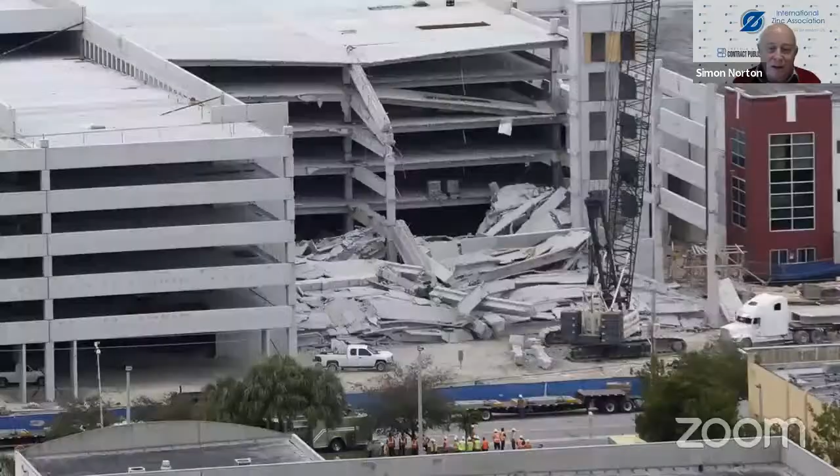You wouldn't like your construction or design to look like this. It's likely this was the failure of a decking system where de-icing salts got into the structure, attacked the reinforcing steel, and the entire building collapsed. What we hope to do with these seminars and webinars, and with today's, is to show you how you can use zinc in its powerful role to protect against corrosion.

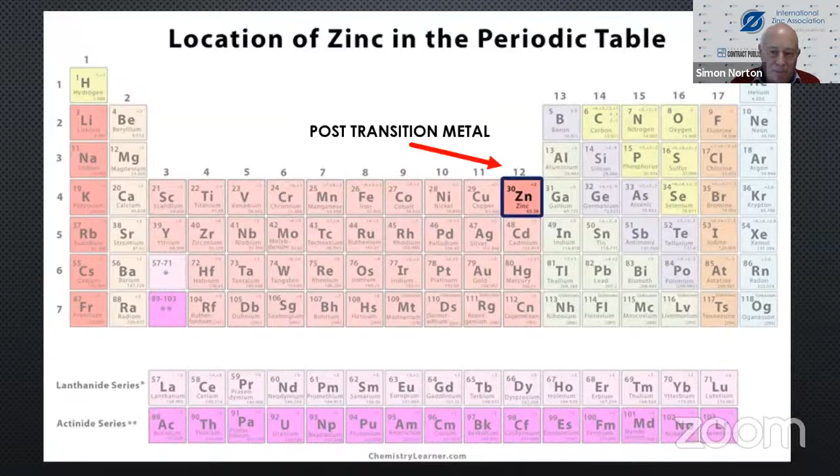Now, zinc in the periodic table is located in what we call the post-transition metal area. The transition metals, the most famous of which are cobalt, platinum, palladium, nickel, copper, silver, and zinc, cadmium, and mercury, are what are known as the post-transition metals. Zinc has an atomic number of 30, and it's got 5 stable isotopes whose average atomic weight is 65.38.

The number of electrons in zinc is 30, the number of protons is 30, and if you subtract the atomic number from the atomic weight, you will get 35. That's the number of neutrons.

Zinc's physical state is a solid. Its crystal structure is hexagonal, and its high valence, or what is known as its oxides, have both acid and base properties. This is absolutely vital to understanding how zinc works when you use it in its role as an anti-corrosion protection mechanism. By its electron configuration, which is actually the configuration of argon in the square brackets.

There's the argon configuration, and that would be 1s2, 2s2, 2p6, 3d10, 4s2. Now, each of these levels, 1s2, 2s2, 2p6, 3d10 — that's the third shell. And in the D shell, there are 10 electrons. There are no empty spaces. And then you get 2 electrons in the 4th shell.

This makes zinc particularly easy to ionize. In other words, it loses these 2 electrons, and its main form in which it's found is zinc +2. So when you find it as a mineral, where we pull it out of the ground and then treat it to produce pure zinc, it's found as sphalerite, zincite, franklinite, or calamine.

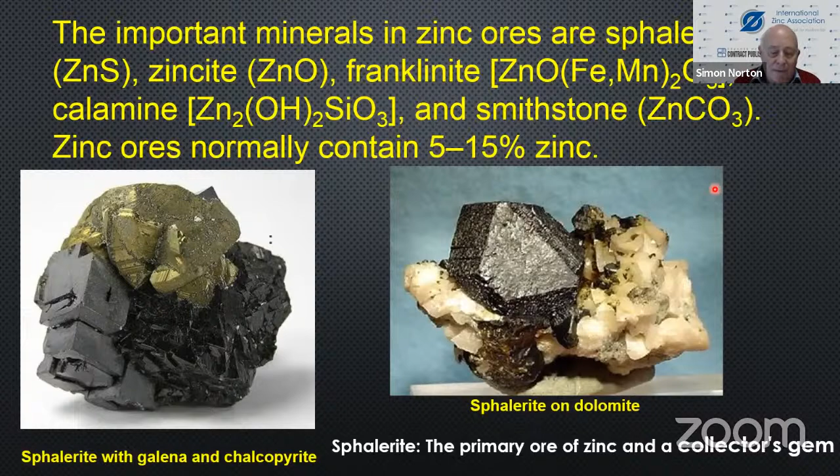We have a particular problem in South Africa in that our zinc sulfide ores contain contamination with manganese, which makes the process chemical engineering quite difficult. However, I'm not talking about geology here, just giving a bit of background to its chemistry.

Now, critical to the chemistry of zinc—Graeme Stead will be talking about zinc rich paints, and Martin Gagne about zinc thermal spray. Critical to this is what we call the galvanic series.

Essentially, when you coat zinc onto steel to protect it against corrosion, what you're doing is sacrificing the zinc to protect the steel. The zinc forms an anode and is slowly eaten away and lost. Therefore, the thickness of the zinc coating is critical to your corrosion protection.

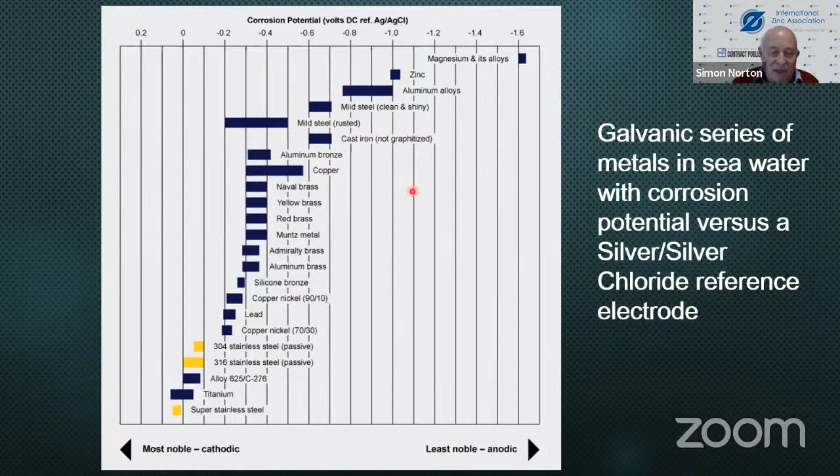But the main point is that zinc sits here, and it's the least noble or anodic of these materials, while mild steel sits over here. You can see the voltages from minus 0.2, or 200 millivolts, down to 500 millivolts—but look at where zinc sits, right over this side. So zinc is going to be sacrificed as the least noble material. That's what we'll be discussing later when they talk about the zinc-rich paints.

Now, as I mentioned earlier, zinc has a peculiarity you need to watch out for. If, for instance, you use a galvanized roof that isn't coated, or a hot-dip galvanized steel structure, and you use it in a wastewater treatment works, and that wastewater treatment works liquor or water becomes acid, you will get a reaction between the acid, the zinc oxide, and a base.

Sorry, if you've got a basic solution, which is quite possible because wastewater can vary depending on what's dumped into it by the users, you will still get a reaction with the zinc oxide.

If you've got zinc oxide playing an acid role and you get a base, you're going to get a reaction of acid and base, giving you salt plus water. So you're going to start attacking the zinc.

Equally, if zinc plays the role as an alkali, and you've got hydrochloric acid, let's say you've got an acid medium. Say a factory in an area of South Africa near a wastewater treatment works dumps a large slug of acid by chance or through an accident into the wastewater treatment system. And you have zinc galvanized steel structures working in those tanks, you're going to get a reaction and attack on the zinc.

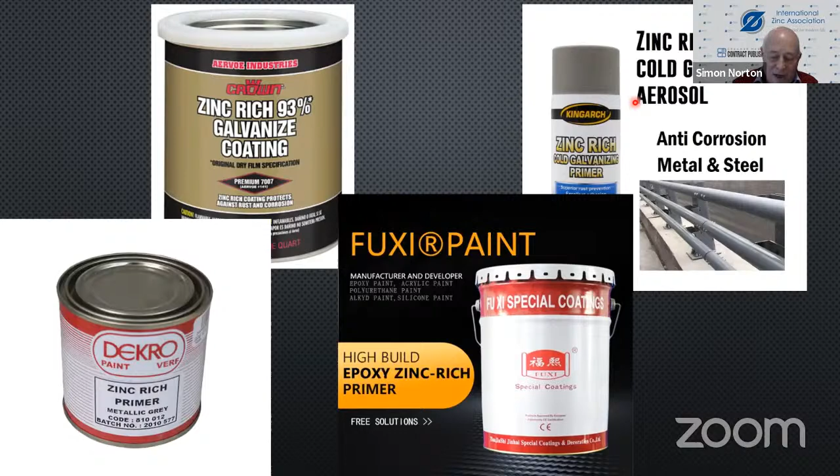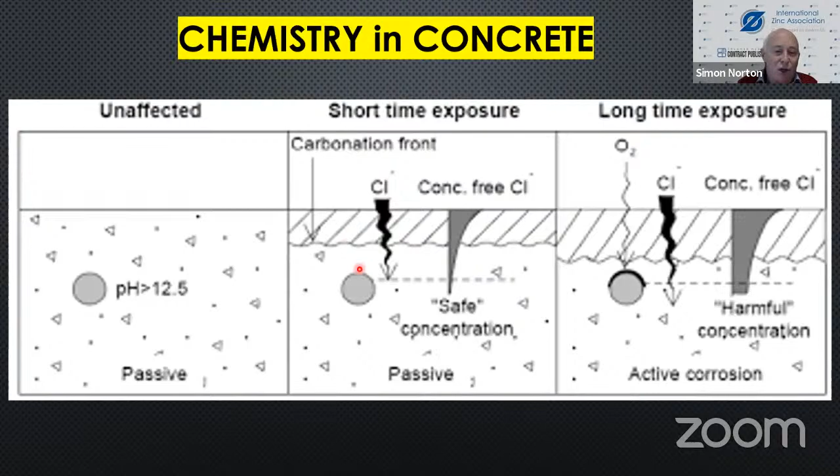That's where zinc comes into play. If you take your rebar and galvanize it before you put it into concrete, you will have a much longer life out of your rebar. Just a short revision.

The electrochemistry of the corrosion of steel in water, or in an aqueous solution as we call it. There's always a corrosion cell available that occurs where zinc or corrosion takes place. In particular with zinc, you'll have an anode. With steel, you'll have an anode and a cathode. But that applies to other corrosion as well, on aluminium, on copper. I'm just using the example of steel because we're going to coat it with zinc.

So at the anode, iron is oxidized to what we call the ferrous ion. Iron naught goes to iron plus 2, and it generates 2 electrons. Those electrons are then transferred across to the cathode. On the surface of steel, there are thousands of anodes and cathodes, all reacting simultaneously.

At the anode, you have what's called oxidation - you lose electrons. At the cathode, you have what's called reduction. Here we've got oxygen being reduced to the hydroxide ion. That reacts with the ions formed here in solution, and you get iron hydroxide, iron oxide, and you get corrosion. Slowly, your steel or material is taken and disappears. That's where zinc comes in - zinc coated on the surface protects it.

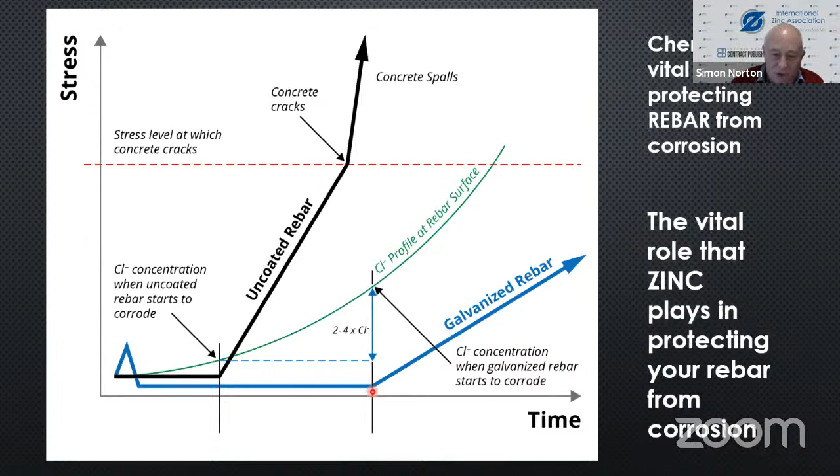Now let's look at the chemical impact of the atmosphere on a zinc-coated steel. This steel might be your ship superstructure that's been zinc thermally sprayed, or a warship missile launcher housing that's been zinc thermal sprayed, maybe even zinc-rich paint coated. Mine shaft support structure - you didn't galvanize it, but decided you better protect it, so you called in spec coats and they carried out zinc-rich paint coating. Or a dockside crane, where during maintenance you used either zinc thermal spray or zinc-rich paint.

What actually happens there? Well, this is what actually happens. We're not talking about galvanizing at the moment, we're talking about just zinc - zinc-rich paint or thermal spray. It first forms zinc oxide and zinc hydroxide. Then it reacts with the carbon dioxide in the atmosphere to form zinc carbonate hydroxide, and with the oxygen in the atmosphere. Then, because it's at the sea and there's salt spray, it reacts with the chlorides, and you get zinc chloride hydroxide in this quite complex molecule.

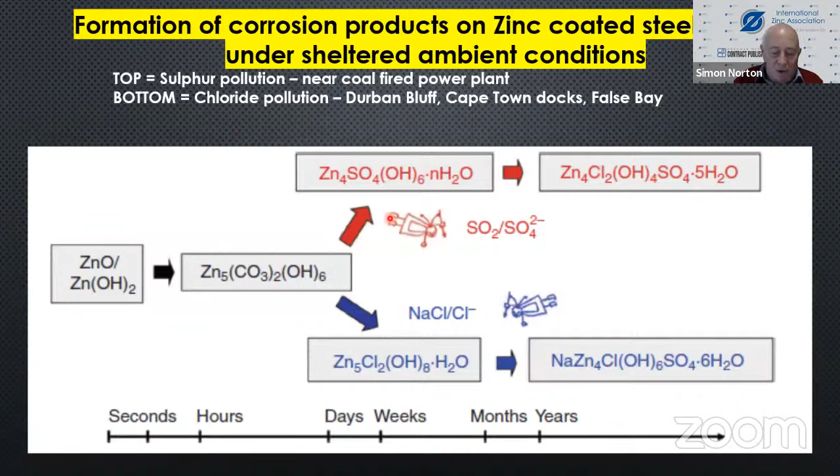And how you use this knowledge will determine how you design your structure, protect it, using what the other expert speakers are going to be talking about.

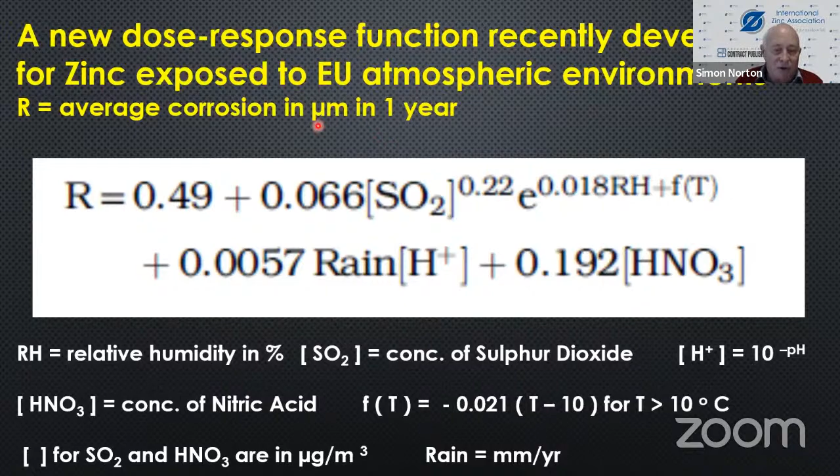There is a model that's been developed for European Union atmospheres, and I would imagine it could be used in South Africa relatively easily. You need to measure how much SO2 is in the atmosphere. The relative humidity you can measure easily with an instrument. The temperature equation, you just measure the temperature yourself. The pH you measure by measuring the rain pH. And the nitric acid, well, there's very little in our atmosphere, but if you can measure it, you do. Otherwise, you just make that term zero. And there you get the average corrosion rate in microns per year. It's quite useful.

Our aim at the International Zinc Association is to guide you and assist you in making a choice such that your product or your project will last as long as possible, that you'll get a massive life, that there'll be limited capital expenditure, that maintenance will be kept to a minimum, and that you'll get a longer life than you would if you had not used a zinc-based product.

Now, Graeme Stead is going to be talking about zinc rich paints, but I'm just talking about the chemistry of it. You get an anode and a cathode, and you've got a hole in a zinc coating. The zinc then forms materials like zinc oxide, hydroxide, zinc carbonate, and this little hole fills up. By this action, eventually the coating protects the underlying material.

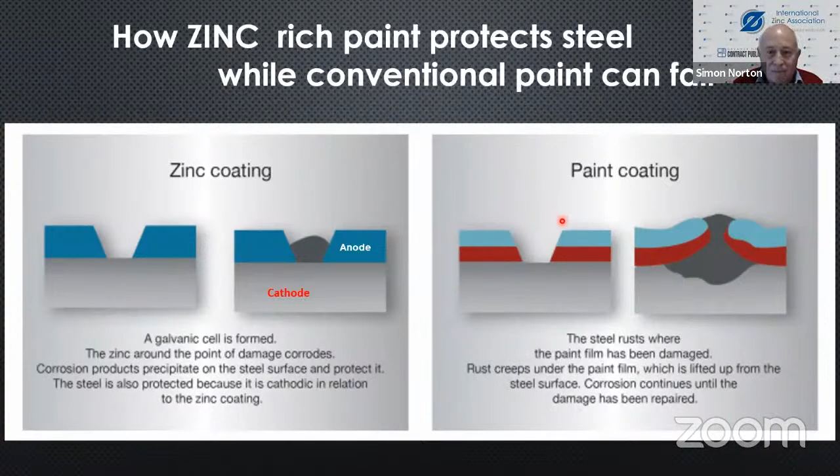If you only have a paint, a conventional, ordinary, run-of-the-mill paint, when the paint cracks or is damaged, then you've got the steel exposed to the atmosphere, corrosion forms, the paint then peels away, blisters and comes away, and the life of your machine, product, whatever it is, is shortened. So there you have it, a quick chemistry lesson on zinc and how its chemistry allows it to protect steel.

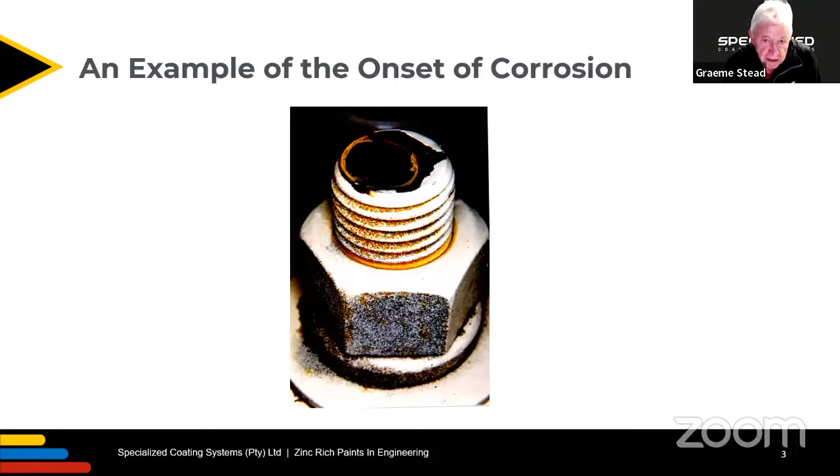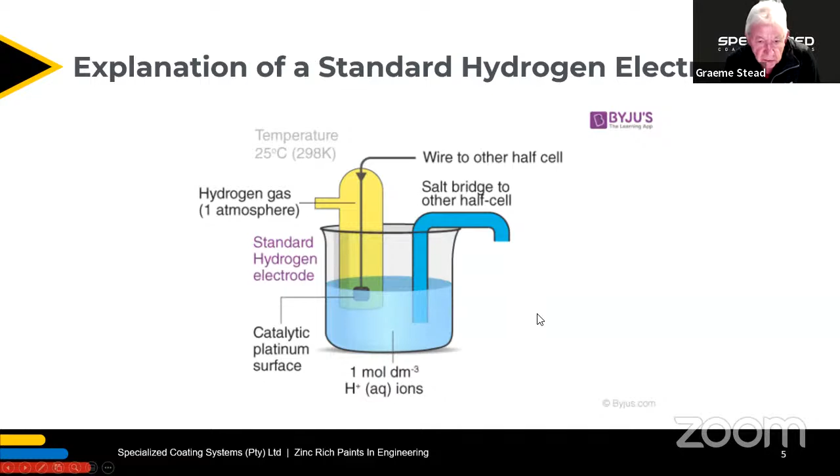Just to recap, how can I get rid of this? Okay.

Galvanic cathodic protection, or active protection, arises from zinc, the anode, sacrificing itself in favor of the base metal, steel, the cathode, with the resulting flow of electrons preventing steel corrosion. In this way, the protection of the metal is achieved until the zinc layer is eventually consumed.

The term galvanizing embraces a number of processes whereby zinc is applied to steel for corrosion protection. These include the relatively thin coatings applied by the continuous process to galvanized sheet and wire, extremely thin zinc coatings applied by electroplating, and the substantially thicker and hence more durable coating consisting largely of corrosion and abrasion-resistant iron zinc alloys associated with hot dip galvanizing of structural steel and related components, including fittings and fasteners.

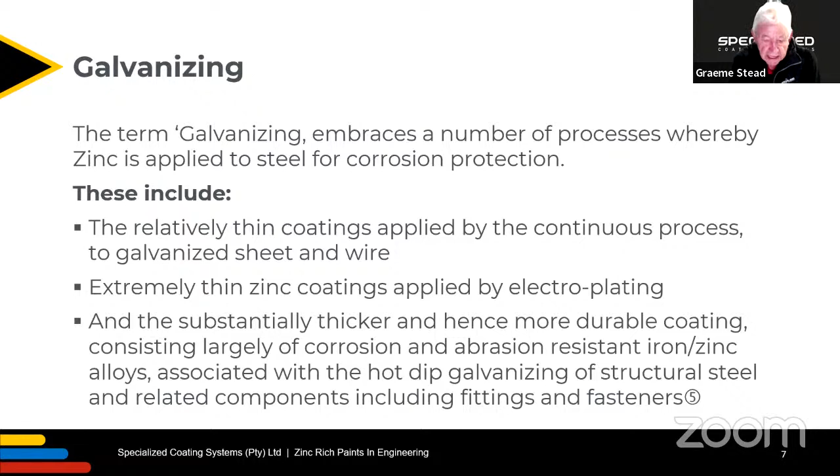Now, this process happens at the temperature of 430 odd degrees Celsius, and no other process can build up those very important iron zinc alloys. Let nobody convince you that zinc coatings can do the same, but zinc coatings can make up in other ways.

Another method of applying zinc to steel is by means of the well-known thermal spray process, which we're going to learn about shortly. Mechanical plating is produced by impact from small beads, which are tumbled together in a barrel with zinc powder and cleaned workpieces. No heat is involved in this process.

Sherardizing is a hot process where chemically clean products are tumbled in a barrel which contains zinc powder and sand. The process is carried out at a temperature of about 370 degrees Celsius, some 50 degrees Celsius below the melting point of zinc. The result is a hard, uniform, abrasion-resistant coating consisting entirely of iron zinc alloys. This is very effective for fasteners, which are generally not galvanized because of hydrogen embrittlement and the danger of progressive cracking.

Zinc is an unstable metal which reacts readily with its environment, and the property that gives zinc its corrosion resistance is its ability to form a protective layer which consists of its own corrosion products. Once the protective layer has formed and completely covered the surface of the metal, corrosion proceeds at a substantially reduced rate. Zinc forms an amphoteric oxide with the result that both acidic and highly alkaline conditions adversely affect its corrosion resistance.

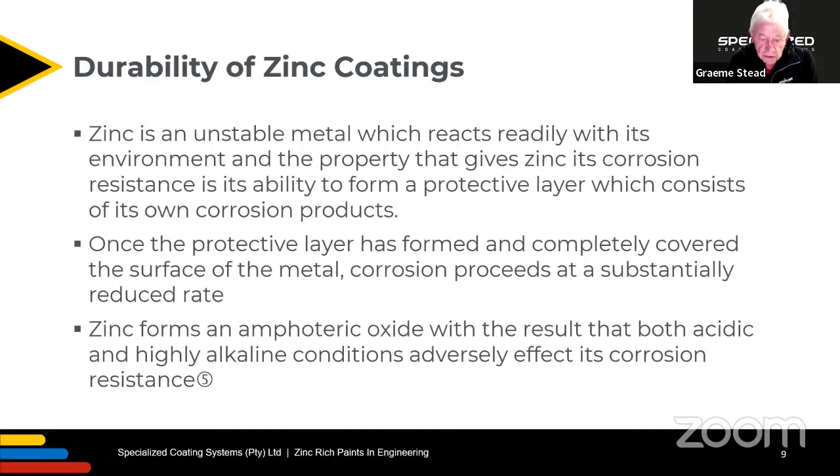So Simon has very eloquently elaborated on that.

And that results in a relatively thin coating, and in years to failure, we're talking about 8 to 10. On the cheap galvanized sheeting, it's down to 60 grams per square meter, and that is very vulnerable to corrosion. These are minimum ISO 1461 mean coating thicknesses for the various thicknesses of steel.

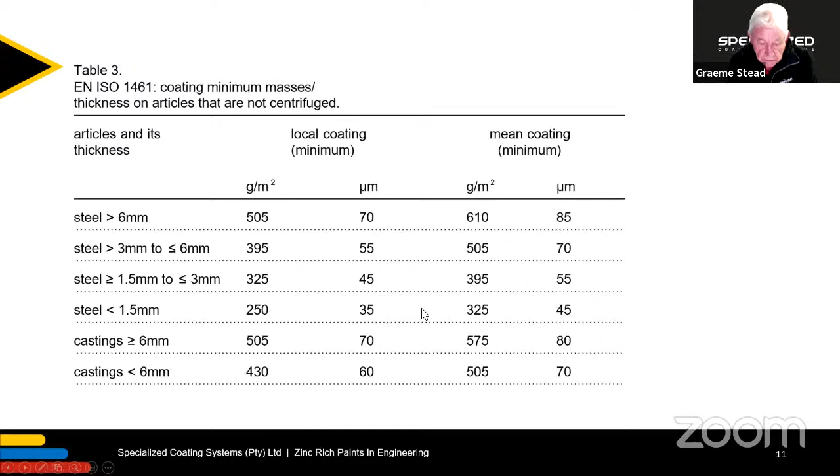So just a little bit of the history of the zinc coatings. The recognition of bimetallic couples, electrochemistry, electroplating, and the electrochemical theory of corrosion happened in the late 18th century.

Protective value of electroplated zinc on steel was recognized, and hot dip galvanizing was gaining acceptance by the middle of the 19th century.

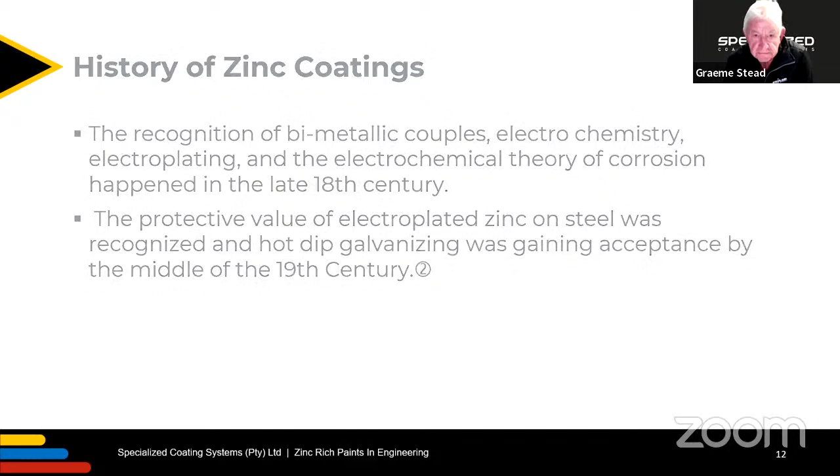Zinc powder paints were first introduced to prevent linseed oil paints from peeling from hot dip galvanized sheeting. The mechanism was the finely dispersed zinc particles reacted and absorbed the low molecular weight organic acids, which are the byproducts of the drying of the linseed oil film. These early paints were never a success.

The first thing I learned in the paint industry is that you never put alkyd paints on galvanized sheeting, because the oxides saponify the oils in the alkyds and form a soap. Saponification is the formation of a soap, and that soap layer forms a very efficient release layer for the paint. It's very, very good business for the paint industry, actually.

Little progress was made until the post-World War II years, until the talented team under Dr. Evans in the Cavendish Laboratory at Cambridge University did basic research on zinc powder coatings, and several important things happened.

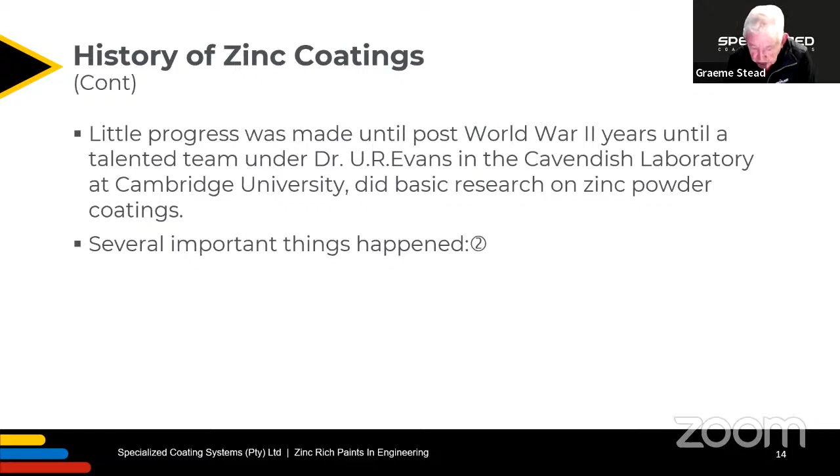The zinc metal industry became capable of manufacturing powder of higher purity and uniformity of particle size. Now that is very important.

Epoxy resins and non-saponifiable polymers such as polystyrene became commercially available, and polystyrene has been superseded by much more stable polymers such as acrylics, vinyls and many others. Then ion exchange clays capable of giving non-viscous gels and organic solvents helped solve storage and application problems.

Because of the high density of zinc, it sinks like a stone, and one has to keep it in suspension and supply a can that can be reconstituted by stirring in a relatively short time.

Ethyl silicate, which had been produced in tank car quantities during the war to produce ethanol and propanol solid fuels, and as a mold binder in the lost wax casting process for high performance alloys, became a surplus commodity. In the paint industry, we are governed by the availability of raw materials.

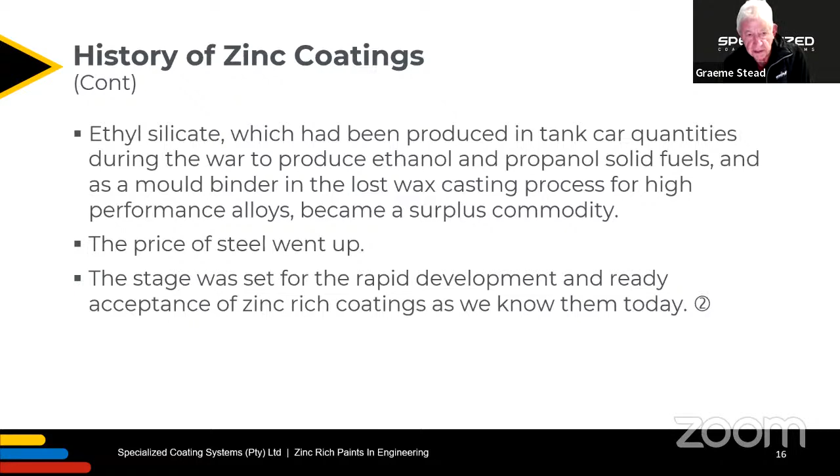The next thing that happened is that the price of steel went up, so it was very much more worthwhile protecting it. Then the stage was set for the rapid development and ready acceptance of zinc rich coatings as we know them today.

A comparison of various zinc coatings. It should be noted that each coating has its strengths and its weaknesses.

Hot dip galvanizing, for its generally high performance, which has been proved over many years, especially in duplex systems. Duplex systems, those are the coatings that cover galvanizing, must be the subject of another webinar. It's a very complex subject.

Its ease of application on small parts, its penetration and coverage of the corners, and its relative independence of the human element in obtaining uniform film thickness - those two wonderful things about hot dip galvanizing must never be forgotten.

It builds up on edges and it reacts uniformly in that hot environment. It is very difficult for the coating industry to reproduce that evenness.

Silicate types for maximum temperature - these are the inorganic zincs and the alkali silicates. Maximum temperature resistance, 400 degrees C. Maximum self-weathering and excellent resistance to handling and erection damage.

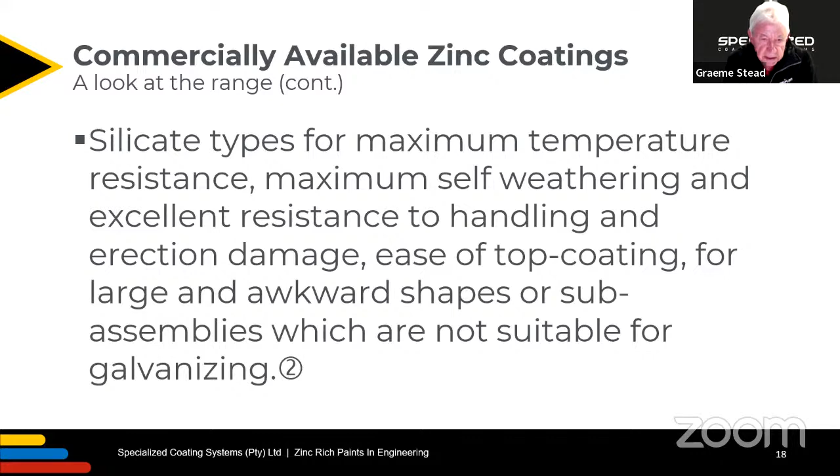Ease of top coating for large and awkward shapes or sub-assemblies which are not suitable for galvanizing. Often a structure will not fit into a galvanizing bath, and the size of the baths is the limitation in many galvanizing plants.

These ethyl silicate-based inorganic zincs are either supplied with the zinc as a separate powder component to be added and stirred in immediately prior to use, or as two components with the base containing the already wetted zinc and ethyl silicate as a second curing component.

They are applied to abrasive blast cleaned steel of an SA3 blast standard and from 50 to 70 microns blast profile, to a dry film thickness of 70 to 90 microns.

The preparation of steel to SA3 is a controversial subject, and that is in fact why a standard of SA2.5 was adopted, because the contractors argued that it was not practical and very expensive to achieve an SA3, which is a clean blast. So SA2.5 is slightly lower than that, but I emphasize that the quality of the preparation is of utmost importance.

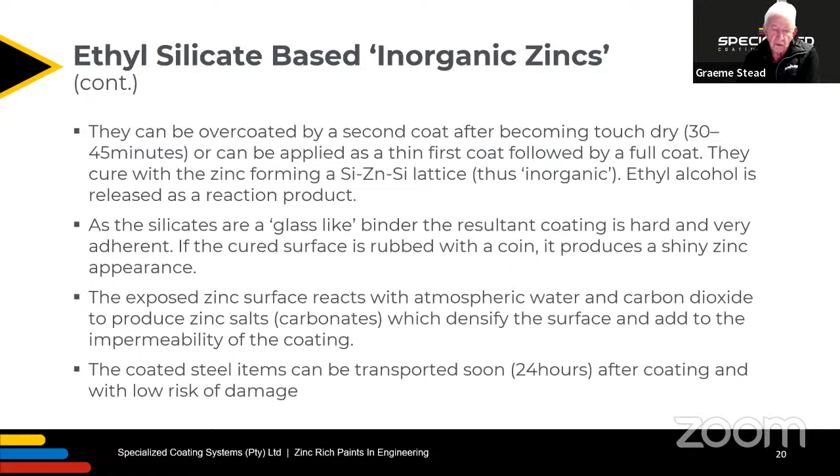The coating can be exposed in non-polluted inland environments for many years, or alternatively be overcoated with a suitable top coat system for more corrosive environments. These types of zinc-rich coatings have been used successfully for the last 60 years with good results. Inorganic zinc overcoated by epoxy has been recorded to last 20 years in a tropical marine environment in the splash zone.

Zinc-rich coatings provide cathodic protection, whereas regular paints protect by forming an impermeable barrier between the metal and atmospheric moisture. The cathodic cell protects the steel at the expense of the zinc. Zinc coatings also provide some barrier protection to the surface.

I emphasize that the surface preparation must be as good as possible, and the surface profile should not be too high. I would say 50 to 70 microns maximum, depending on the final specification. Cleanliness, lack of oil on the surface, lack of dust on the surface. One needs to get the zinc particles in contact with the steel particles as quickly as possible.

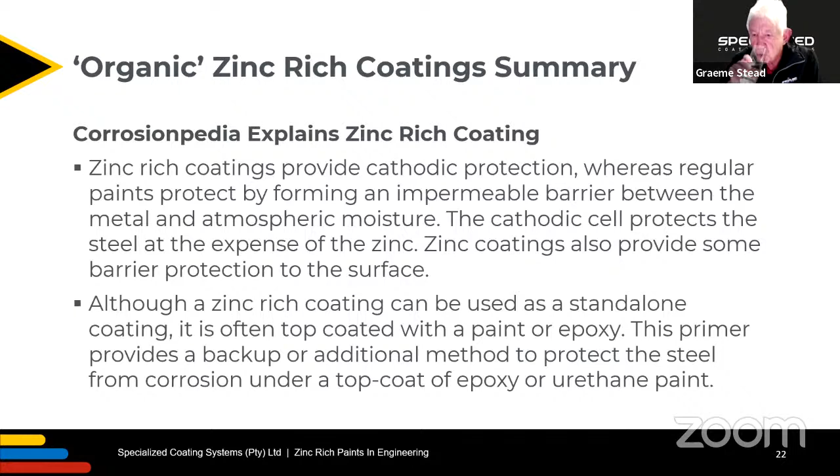There are two types of zinc coatings: inorganic and organic. Inorganic zinc coatings must be applied by spraying. Inorganic zinc coatings provide better steel protection than non-top coated organic zinc coatings when not using a top coat.

Organic zinc coatings are normally applied by brush, roller, or spray. When not using a top coat, they do not protect the steel as well as an inorganic primer. Organic zinc coatings do provide the same degree of protection as inorganic coatings when the coating is top coated. Organic zinc coatings can be a moisture-cured urethane zinc primer, which is easy to apply to a surface.

Now, I must emphasize that the spraying process must include agitation of the pressure pot or container where the zinc is catalyzed, or the single pack zinc is being sprayed from, because the zinc will tend to settle, and one must have the correct amount of zinc in the spray line at any one time.

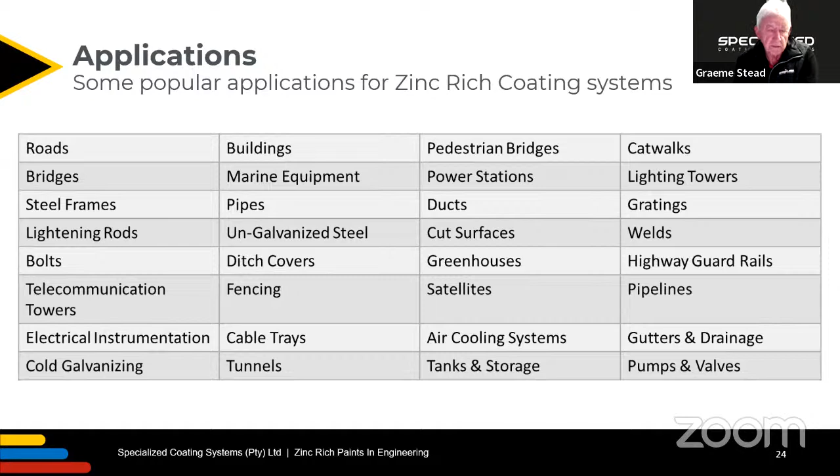Bolts, these things we're very, very familiar with. These are products that we sell. The ZincFix Original is a product I developed about 23 years ago.

After discussions with the doyen of the galvanizing industry in this country, Walter Barnett, who was heading up the Hot Dip Galvanizers Association at the time. And I said to him, wouldn't you like a small pack of high zinc containing repair material for the galvanizing industry to fix up scratches and defects in the galvanizing?

And he pounced upon the idea, and we developed this product, which originally was a 3-pack product because I was not sure of the stability of the zinc in the epoxy component or the curing agent component. I would never have put it in the curing agent component because the amines are very alkali.

So the original ZincFix packets were 3-pack with 2 seals, and it was a bit of a laborious procedure to first mix the zinc in by squidging it around into the base and then opening up the seal and letting in the curing agent. And we had a pot life of about 30 minutes, which enabled somebody to open up the packet and squeeze out the mixed zinc and apply it to get the surface to be protected.

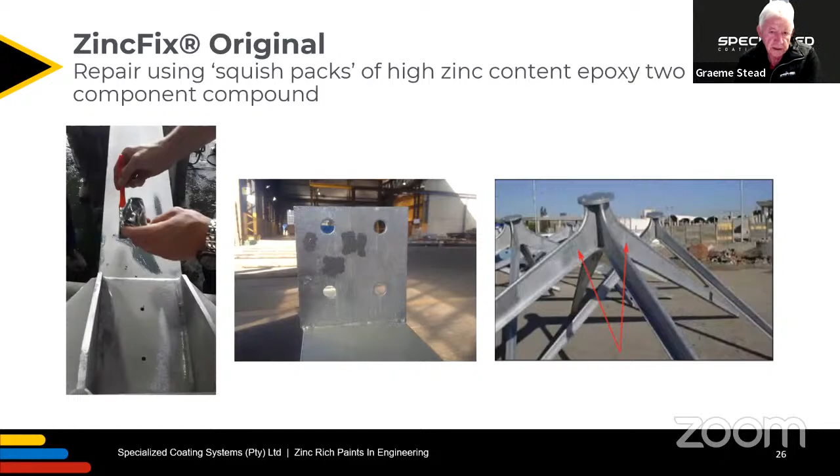So here are the advantages of the squish pack. Easy, accurate mixing of small packs ensures 100% cure and reduces wastage. When you're using such small quantities, you cannot use two containers, because some activator is always left behind, so you don't get an exact mix.

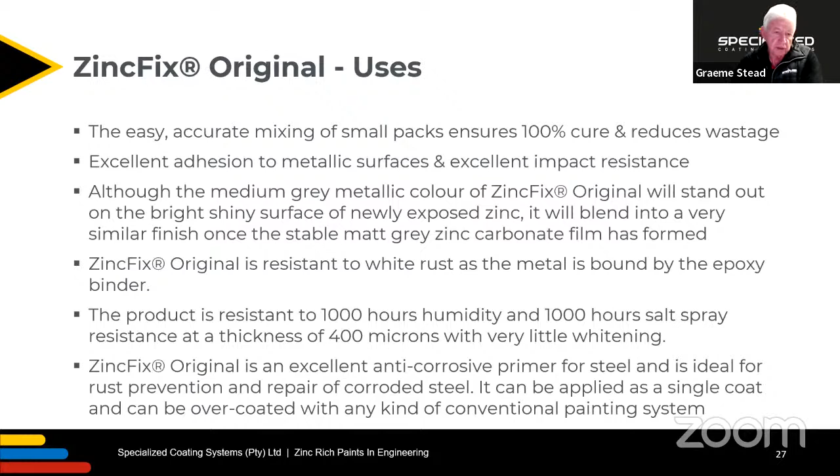The product is resistant to 1,000 hours humidity and 1,000 hours salt spray. I once did an SABS evaluation of ZincFix against galvanized panels, and after 1,000 hours salt spray, the galvanizing was not in good condition while the ZincFix was still in pristine condition. But that was at 400 microns thick.

Then we go on to ZincFix 90, an organic bound zinc rich film with 96% zinc in the dry film. This is where you have to agitate the zinc while applying it, especially by spray, because if you use a roller or brush, it's being agitated by the implements.

It's used as a protective coating by creating a cathodic sacrificial barrier, offering comparative features to hot dip galvanizing in the form of a liquid applied coating. It has the advantage of infinite recoatability with minimum preparation requirements, and is suitable as a coating for structures too obscure or too large for molten zinc baths.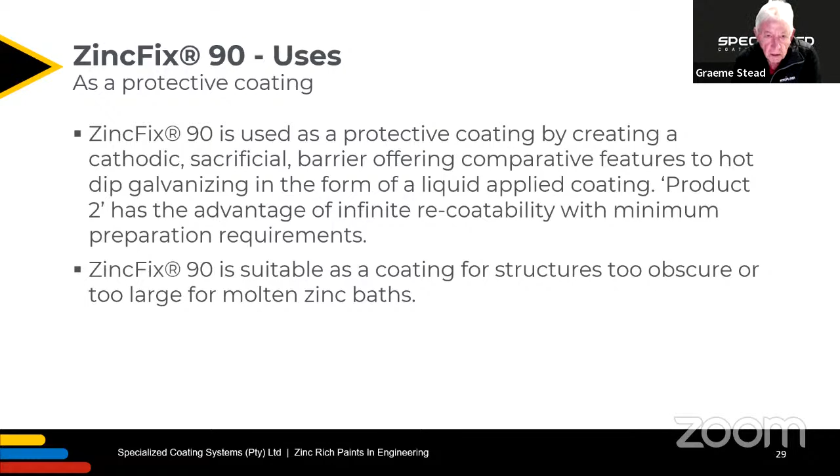That's just a description of its sacrificial properties, and some of the items to which it is applied.

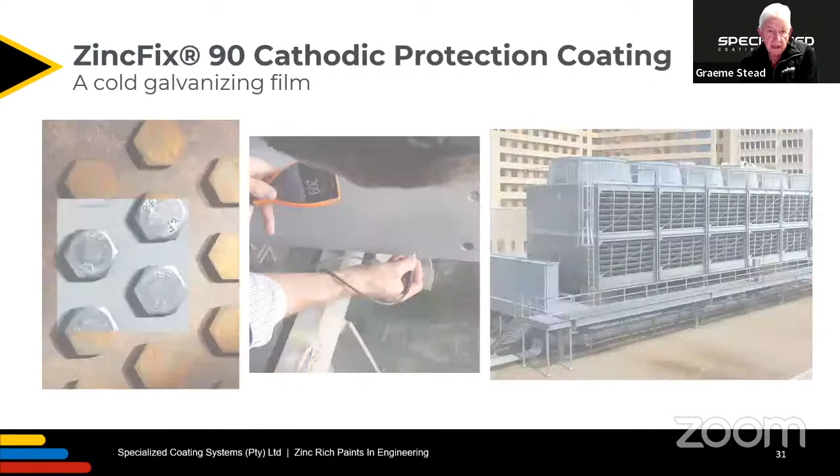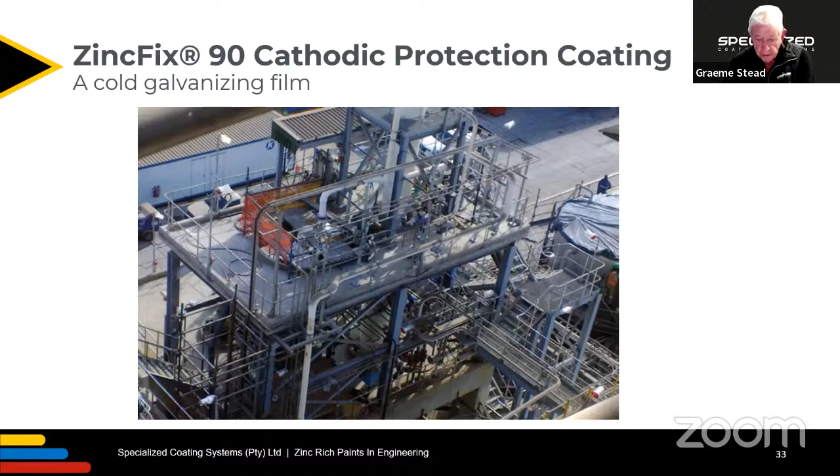The time is up, but I just wanted to mention new innovations. Zinc Flake is now available on the market and is very useful - you can reduce the amount of zinc in a zinc rich paint and get the same corrosion resistance.

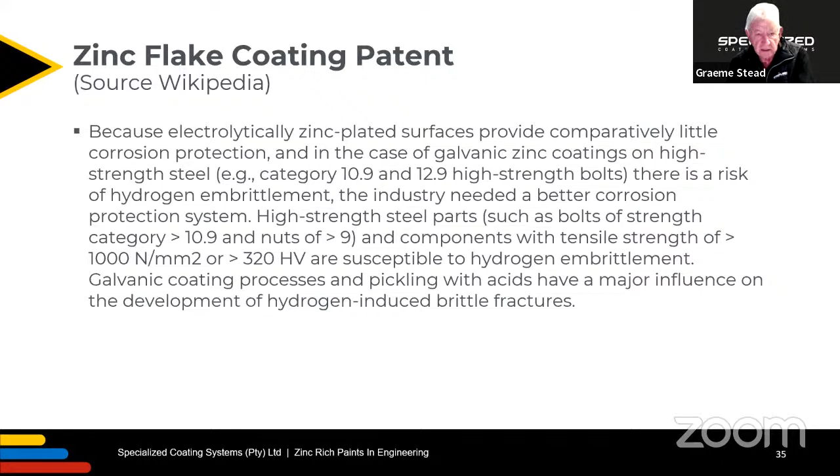This is the patent mentioned, with a thin film thickness of 8 to 12 microns. The zinc flake coatings do not create any hydrogen in the process. They were used for critical applications as an alternative to electroplating. So these are developments with zinc coatings that are going on all the time.

It's a very big subject, and we could go on talking for some time further. Those are my acknowledgements, and I thank you for listening. If there are any questions, please indicate.

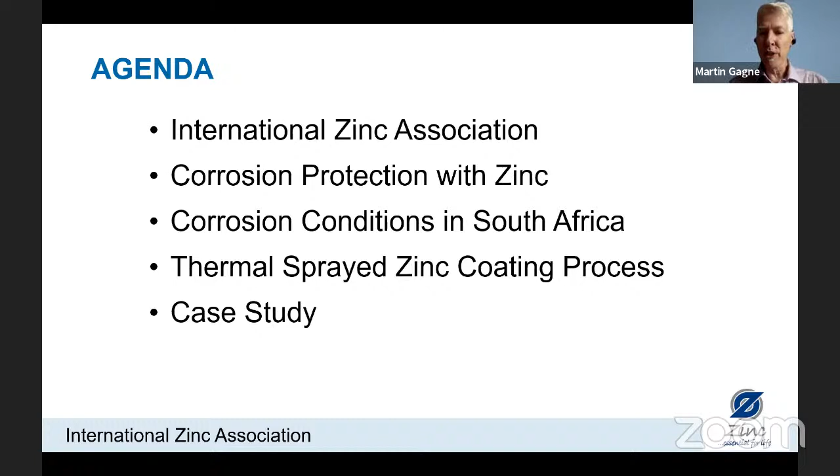The International Zinc Association works around the world to protect and grow existing zinc markets, develop new markets, but also to transfer best practices and technologies.

I'll be showing some case studies from Norway, where they have been using thermal spray zinc on bridges since 1965. Uniquely, every steel bridge in the country is protected with thermal spray zinc, and with fantastic results. Some of those bridges are 50 years old now with no maintenance, and they're expected to last 100 years. So this is a best practice we would like to transfer to other areas.

South Africa also has a coastline similar to Norway, and I think it could benefit from using zinc to improve the corrosion protection of steel structures.

So we will be talking about thermal spray zinc. We're all familiar with hot dip galvanizing - the full immersion of steel in molten zinc - but as mentioned, the steel has to fit into the bath of molten zinc. We can coat some larger structures with this process using a technique called double dipping or progressive dipping. We put one end in the kettle and then flip it over and put the other end in, giving us some leeway to do larger structures. But there is a physical limitation because the bath contains the molten zinc.

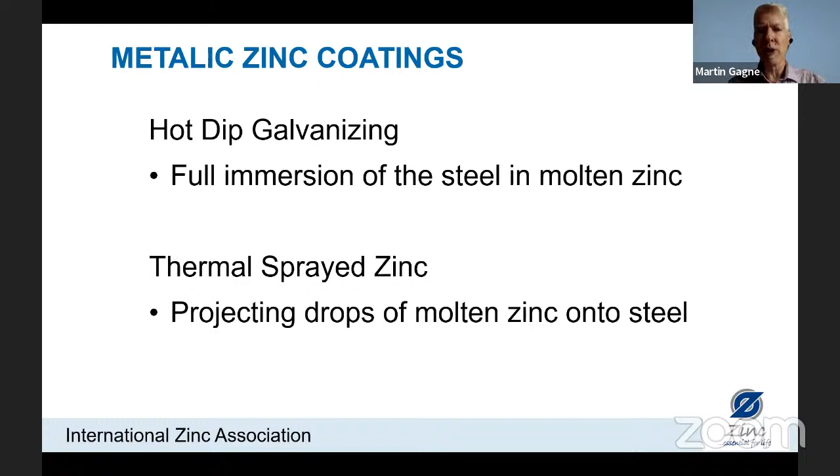Now with thermal spray zinc, it's more like spray painting with liquid metal. We have a heat source to melt the zinc, and we use compressed air to project those drops of molten zinc onto the steel and build up the coating. So in this way, size is not an issue. We can do this process in the factory or in the field, while hot dip galvanizing is restricted to a factory application because size is important.

Generally, hot dip galvanizing is a less expensive process than thermal spray zinc metallizing. But if size becomes an issue, thermal spray zinc metallizing is the only option to get a metallic zinc coating on the steel for maximum corrosion protection.

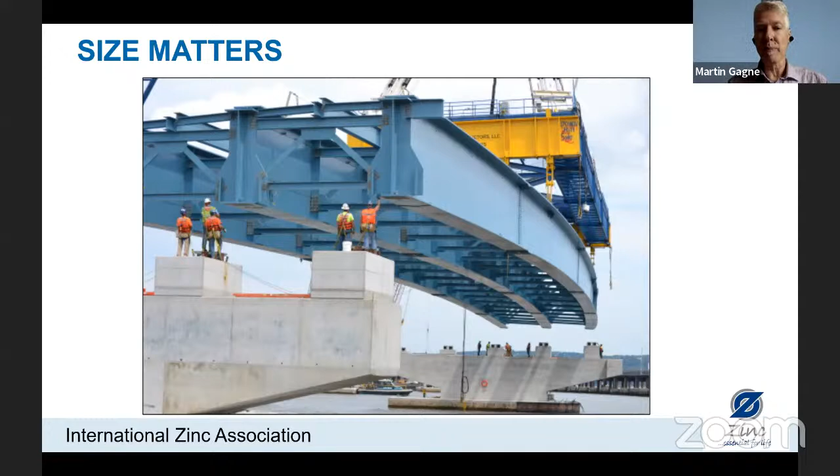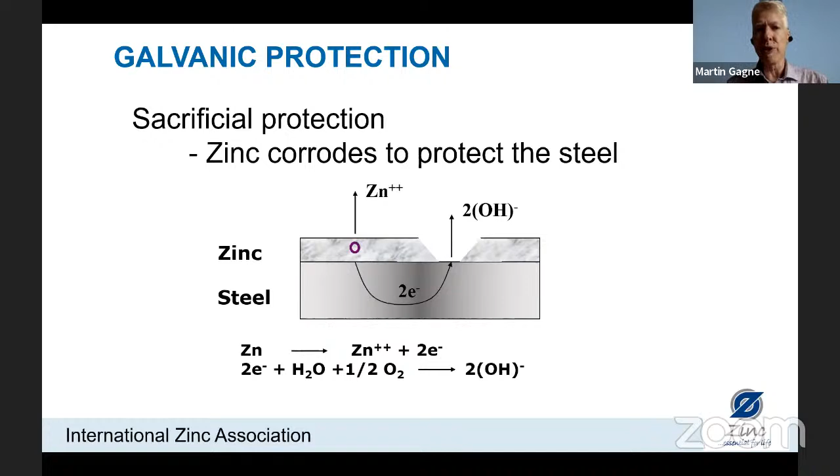So corrosion protection with zinc - first of all, it's a barrier coating, just like paint, but more importantly, it provides galvanic protection. As a barrier, it keeps corrosive environments away from the steel. But more importantly, with galvanic protection - sometimes this is accidental damage where the coating gets scratched, sometimes it's intentional, like when we come to an existing structure and drill a hole to bolt a sign on a bridge - we can be sure that the zinc will continue to protect the steel even if there is damage to the coating.

We saw in the data that Simon showed magnesium has 1 full electron volt potential difference with steel, so there's quite a lot of driving force there. Magnesium is very reactive, very effective for galvanic protection, but it doesn't last very long. So now zinc is in the middle, in that sweet spot. It has good potential for galvanic protection, but it's not so reactive that it's fully consumed. So it lasts a long time while providing galvanic protection.

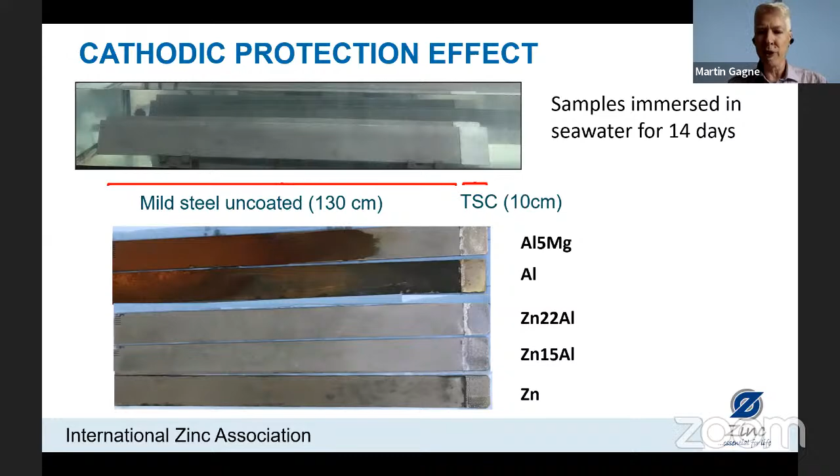Now, if we look at the corrosion conditions in South Africa, the South African Journal of Science published a review in 2019, and they divided the country into various locations to define the corrosivity of the environment. There is a relatively long coastline, 2,800 kilometers. Generally, when we're within 150 meters of the sea, we're in an extreme corrosion environment, designated CX. There is an ISO designation for corrosive environments: C1 indoors, C2 urban, C3 rural, C4 industrial, C5 marine, and CX extreme. So on any coastline we are generally in a very extreme corrosive environment.

If we go from 150 meters to a kilometer inland, the corrosivity will depend on surf action, temperature, topography, wind flow, and we see variations in corrosion rate. One interesting thing is that we have different corrosive environments along the coast of South Africa. If we start on the east, it's a subtropical coast. Then in the south, we have what's labeled in this report as a moderate coast. And on the west side there, the Mediterranean zone, which I found interesting.

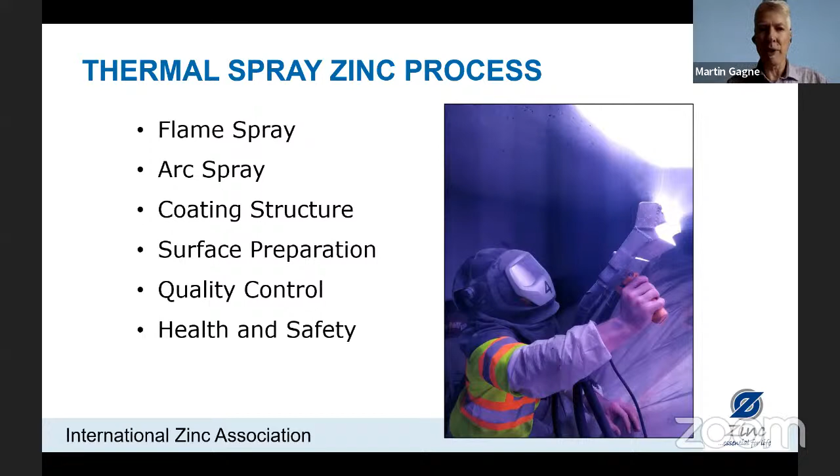So the process itself is quite simple. We have a material feedstock. We apply a heat source to melt that zinc. Then we accelerate the drop against the surface and we build up a coating.

Now for zinc, we can have pure zinc. There's also a zinc 15% aluminum alloy wire. Both of these are very commonly available. There are some other chemistries, but these two are available, perform well, and are most commonly used.

It is a 100-year-old process. This was first demonstrated in 1912 by, I think in Germany, Dr. Max Schoop. So we're not talking about a new or innovative technology. This is quite well established and has a long and successful history.

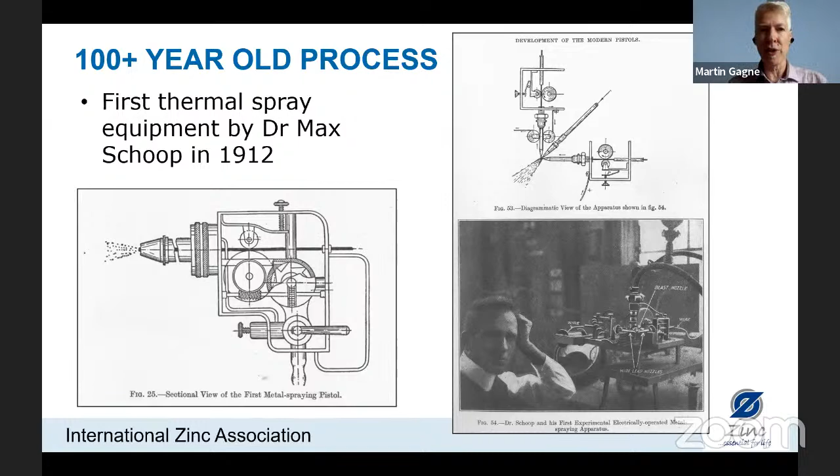Now for flame spray zinc, the feed source is a wire, and this is fed into a torch, generally an oxyacetylene flame, and that melts the zinc, and then with another gas, either compressed air or nitrogen, we propel those drops onto the work surface.

Now for arc spraying, we use two electrically conductive wires. When these touch, they create an arc, and then that melts the wires. And again, with compressed air or other gas, we can propel those liquid droplets onto the steel.

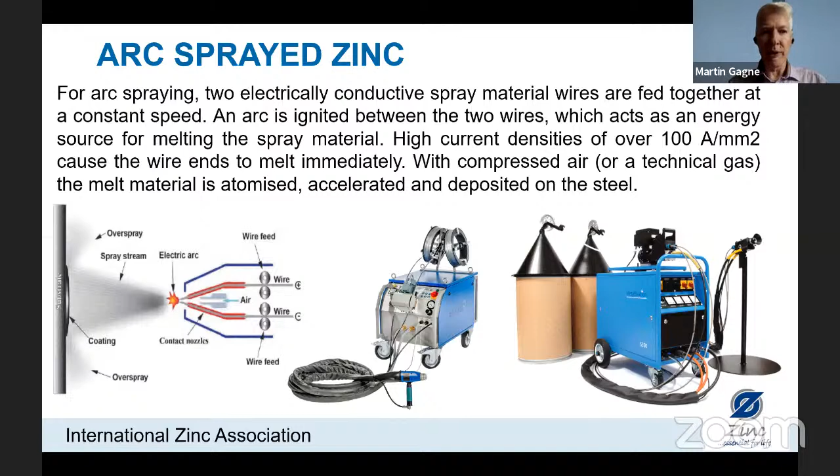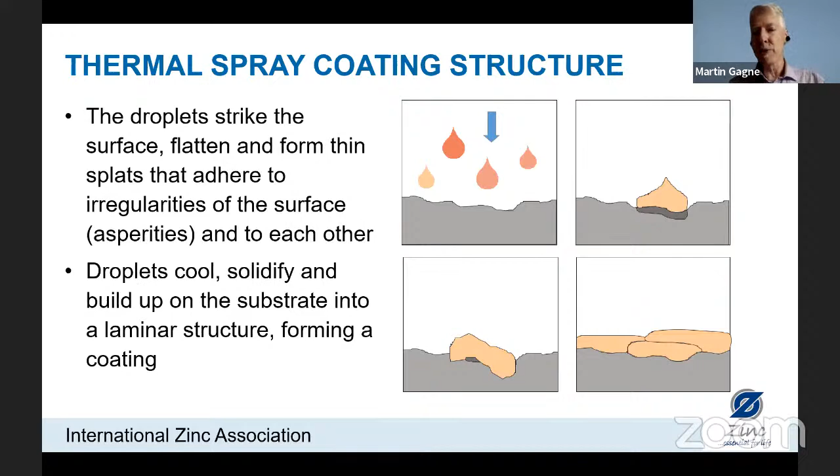If we do build up to a coating thickness, normally 100 microns, very similar to hot dip galvanizing, even if there is porosity or voids, they are not interconnected, and there's no through-thickness porosity where any corrosive elements can get through to the base steel, even if the thermal spray coating is left on its own.

Now, because we are spraying onto the steel, there is no metallurgical bond. We are talking about a mechanical bond. This is why the surface preparation for thermal spray metallizing is very important. You have to have a very rough surface to allow that mechanical interlocking of the zinc particles with the surface on those first few layers, to give us a very good bond with the steel.

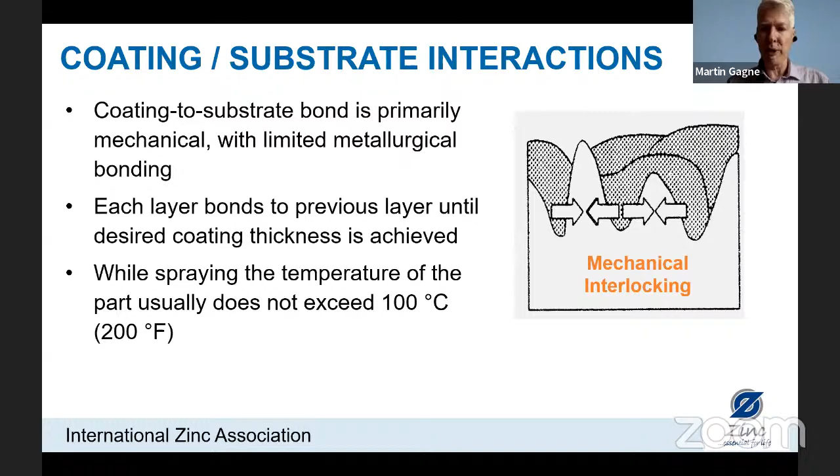So now for surface preparation, again, it's grit blasting which is key. This is the key requirement for surface preparation. We need to have this sharp angular profile.

Now, Graham had talked about the SA3, which is a white metal surface preparation. SA2.5 is a near white metal. And SSPC, the Society for Protective Coatings in North America, they also have a white metal or near white metal designation, 5 or 10. The same with NACE. SSPC and NACE have now joined to form AMPP, but NACE number 1 or number 2 surface profile, this is white metal or near white metal. But the angular profile, we want to have 75 to 125 microns, anywhere from 3 to 5 mils.

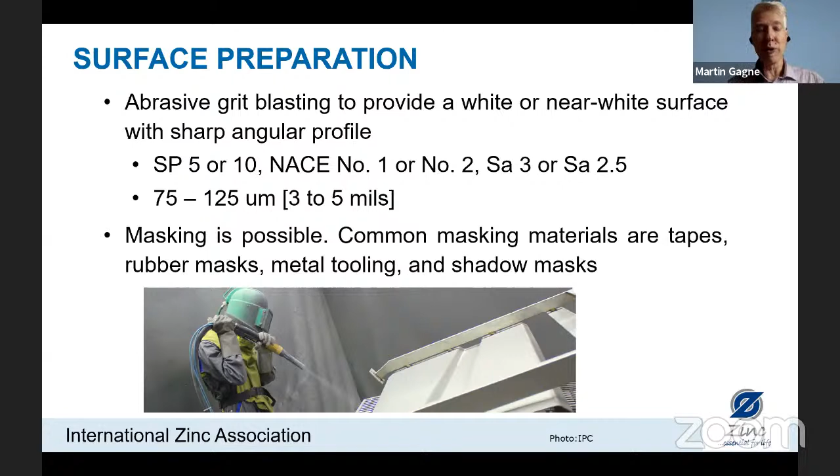If there are areas that we do not want to be blasted, masking is possible and common. We can put tapes or rubber masks on an area of the steel structure that we're blasting so that the surface is not roughened. But generally, anywhere we are going to coat with thermal spray zinc, we want to have this sharp angular profile and a clean surface.

So conditions for blasting, just like paint, we have humidity and dew point considerations, a little bit more forgiving than for paint. We can have humidity up to 85%, surface dew point greater than 3 degrees Celsius.

Graham had mentioned dusting and also chlorides. We want to clean that surface after blasting so that we have no chlorides or dust present before we encapsulate them in the zinc. Although again, the zinc will be more forgiving than a paint.

So ideal abrasives are high quality garnets, and these can be mixed in a 30, 60, 80 mesh blend. Again, large softer abrasives produce a bumpy surface more than a sharp and angular surface. It may be clean, but it will not have the angular surface profile, which is important. And in the shop, where abrasives can be recycled, we have seen successful use of steel grit, although usually we prefer garnet.

Now, after we blast the surface and want to ensure the quality of that surface before we apply the zinc, we do some non-destructive testing. This is generally a tape test.

We try to apply the thermal spray within 4 hours of blasting, but in a controlled environment this window can be extended many hours or days. Mostly this is in a shop environment, although there has been very good field containment where we are able to extend the time from blasting to spraying for whatever reason.

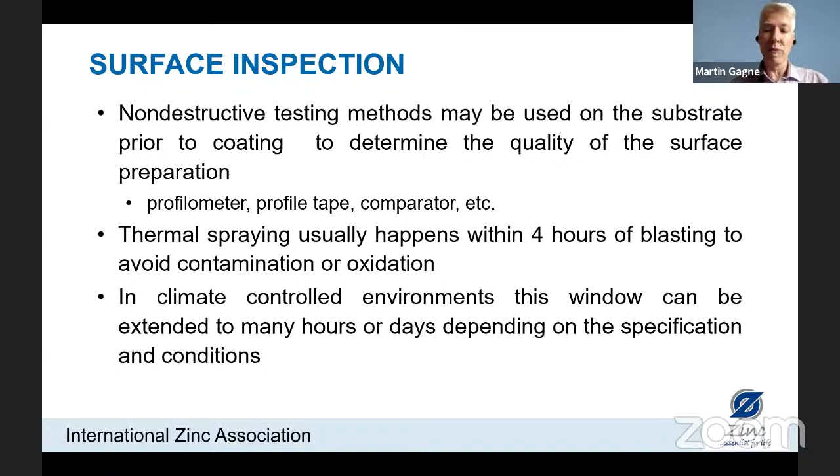For surface profile measurement, there is an ASTM tape test, D4417. This is a standard test method for field measurement of surface profile on blast cleaned steel, very specific to the application. We put a tape on the surface, burnish it so it takes on the profile, and then we can measure the profile on the tape.

Now we're ready to thermal spray. Again, we have very similar atmospheric conditions: humidity up to 85%, and a surface dew point requirement.

Now, Graham had also mentioned duplex coating. If we are just spraying zinc on the steel and leaving it, we want at least 200 microns of metal sprayed on the surface. But if we are going to seal and paint it to make a duplex coating, we generally put 100 microns of zinc, then cover that with a paint top coat. With thermal spraying, each pass of the gun generally provides 100 microns of thickness in any case, so with just one pass we can be ready for painting or sealing.

There is no curing time with thermal spray zinc—it is ready to be painted immediately after application. But if we want to use the thermal spray zinc only for corrosion protection, we should have a slightly thicker coating, or twice the coating, meaning reapplying another layer of zinc. Now we can use thinner zinc with painting because the paint adds barrier protection onto that zinc, and the zinc will remain untouched as long as the paint is available.

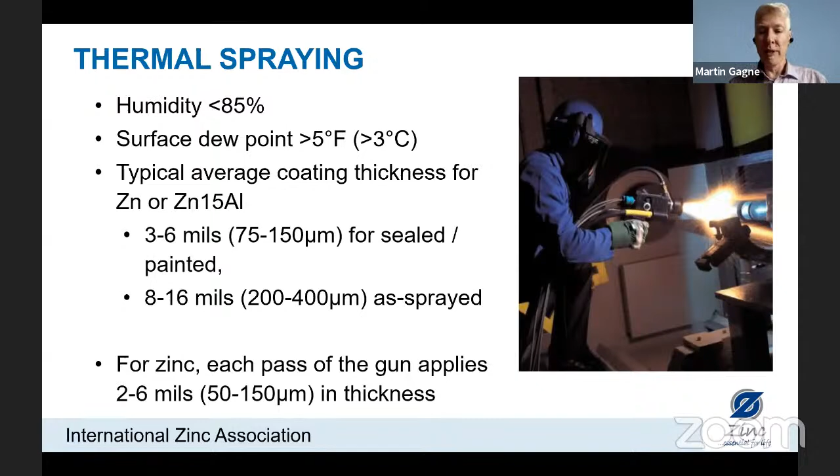Along with testing the surface roughness, we also want to measure the coating adhesion after the zinc has been applied. Another ASTM test, D4541, the standard pull-off test. With pure zinc coatings, we generally achieve higher than 3.5 megapascals, and the zinc 15% aluminum has slightly higher strength—better than 5 megapascals of pull-off strength. Again, these are significantly higher than most paint bond strengths.

There is a standard bend test for measuring ductility of materials, but there is no accepted test for metallic coatings. So there is a generally accepted practice to spray onto a steel coupon and do a 180 degree bend test around a half-inch mandrel. We can see some cracking here. Cracking is acceptable—it is flaking that registers as a failure in the bend test.

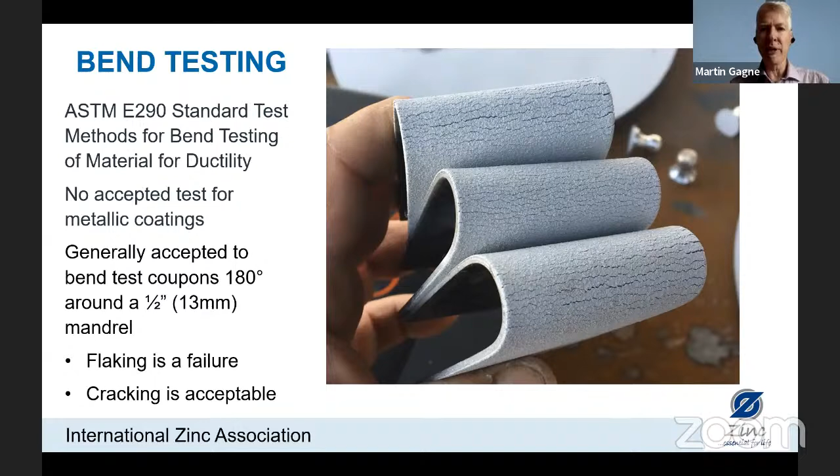So we've talked about a duplex coating, putting a paint top coat on top of thermal spray zinc. The sealant really fills the porosity at the surface, and is sometimes called the tie coat because it aids paint adherence, although the rough surface of the thermal spray zinc is an excellent anchor for any paint coating. This extends the life of the thermal spray zinc coating by adding another barrier coating. The paint will protect the zinc, but now the zinc will also protect the paint if there is a scratch or a hole through a duplex coating.

We saw an example where if we have paint on steel and scratch through, the iron will begin to rust, and iron corrosion products can take up 7 times the volume of the iron. This puts enormous pressure on the paint film, so at those edges it can't withstand that pressure. It starts to peel up, and we get a phenomenon called underfilm creep corrosion.

Now, if we have paint on zinc and scratch through, even to the base steel, the zinc will protect the steel from corrosion, so we don't get these high volume iron corrosion products. We will start to get zinc corrosion products, but these tend to build up in the crevice, so we don't get pressure on the paint film. The paint stays intact right up to the scratch or hole. So the paint gives extra barrier protection, and the zinc also protects the paint, giving much improved longevity of the combined coating.

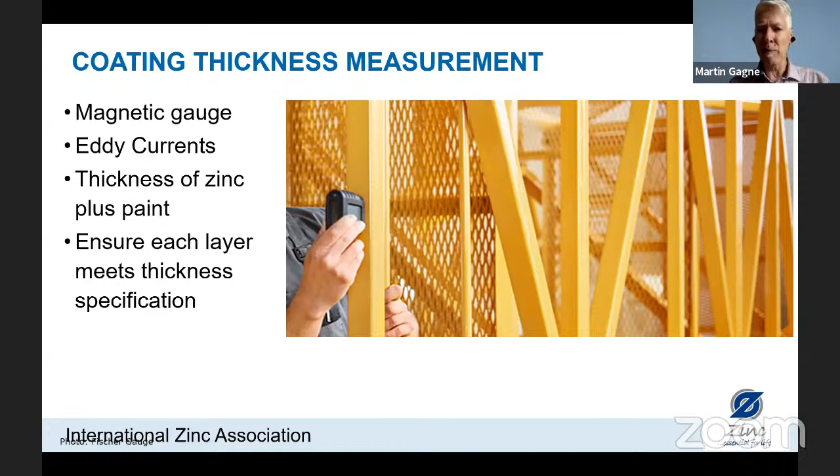Some defects for thermal spraying: thin coatings - apply the zinc and paint to the specified thickness. I talked about incomplete melting of zinc, this is called zinc spitting. You have to adjust the wire feed rate to match the heat input to ensure complete melting. Generally this is a very gross defect - it's quite obvious. We will have lumps of zinc sitting proud of the thermal spray zinc coating.

The remedy is very simple - we just sand the coating. It removes those lumps of zinc. There's no need to recoat, or they can be left there if surface quality is not an issue. If this is the interior beam on the bottom of a bridge, you just have more zinc available to help with corrosion protection. But if it's an exposed beam and we want a smooth surface, we can just sand those defects and they will disappear.

And then poor adhesion - again, the surface preparation is quite important. We must have a sharp angular profile. We must spray at the proper distance to ensure good adhesion to the steel.

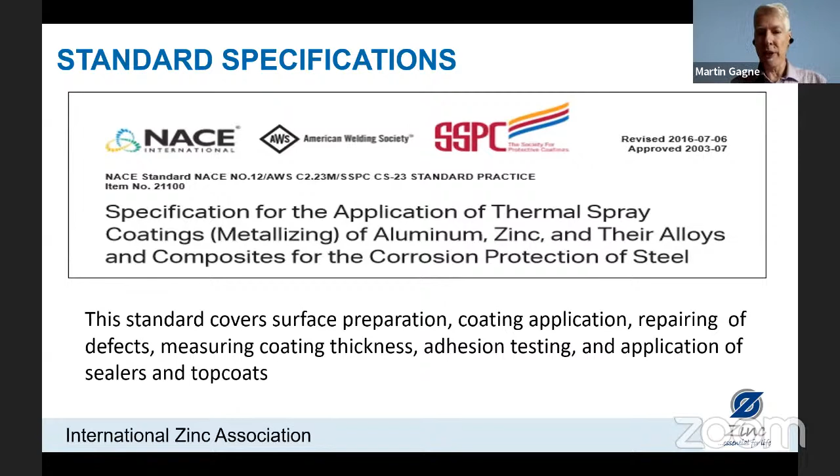Now, all of these topics I've talked about, surface preparation etc., are well documented in this standard. This is a joint standard from NACE, the American Welding Society, and SSPC. It is NACE standard number 12, American Welding Society standard C2.23, and SSPC standard CS23. This is for the application of thermal spray coatings of aluminum, zinc, and their alloys, and composites for the corrosion protection of steel. So this covers all aspects of the process: coating application, surface preparation, repairing, measuring, adhesion testing, and painting and top coating.

There are other standards as well to make sure the operator is qualified - another American Welding Society standard, C2.16, Guide for Thermal Spray Operator Qualification, and an ISO standard for approval testing of thermal spraying. Here, a number of sample coupons are sprayed, the roughness of the surface is measured, the thickness of the coating is measured, and then you can have an examination and be approved as a qualified thermal sprayer.

Especially for arc spraying, there are some health and safety requirements. It is treated as a welding process, so there is some dust that is developed. We need a full respirator helmet with positive pressure inside that keeps any dust from entering the helmet, and a fresh air supply is necessary. Do not use any industrial compressors for air supply - this should be fresh air.

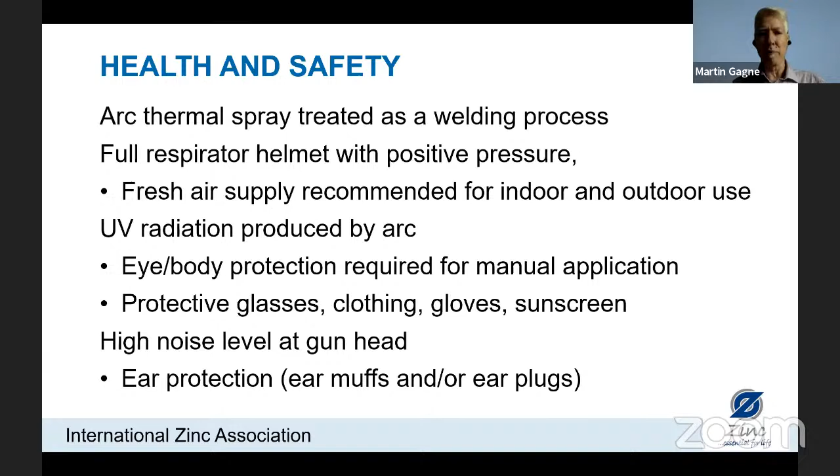There is UV radiation produced by the arc, so we need eye protection and body protection as well. We can have a sunburn from using arc spray, so protective glasses, clothing, gloves, sunscreen. And there can be some noise produced as well from the compressed air, so ear protection, whether that's earmuffs or earplugs.

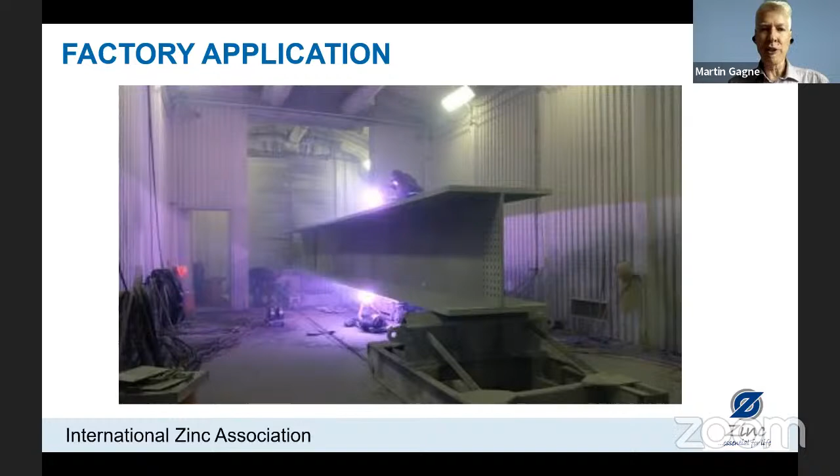So a photo showing some factory application. Here we have two operators, one on top, one underneath, manipulating the thermal spray guns to coat this steel beam.

My first case study here is the Memorial Bridge. This is in New Hampshire. It crosses an ocean passageway. This bridge had several innovations.

As a truss structure, they removed the gusset plate where the beams join and made one single integral part of steel to better handle the stress at this location, and they moved the bolted connections away from this area. This also helps with corrosion protection. One part of corrosion protection is design—we don't want water pooling at the lowest area of the connection, where generally a gusset plate and all the connectors are. So not only do you have the stress of the bridge structure, you can have pooling water.

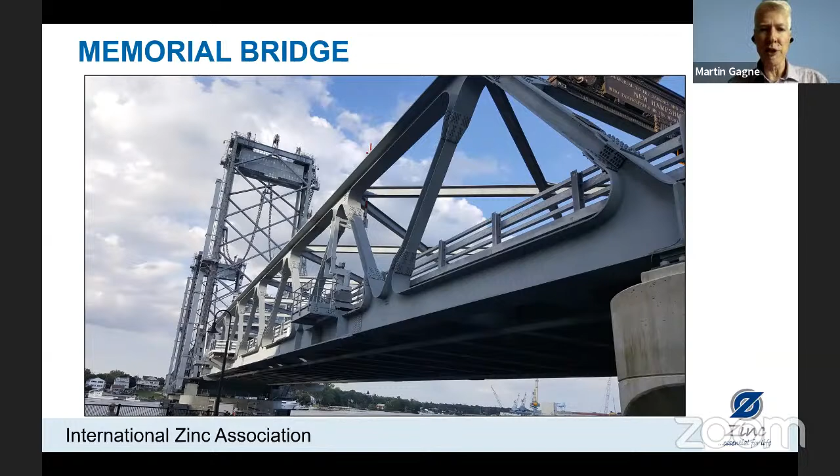The structure on the left-hand side of this photo is a lift bridge. It's actually in the middle of the bridge, but the remainder of the bridge is fixed, while this portion lifts up and down to allow ocean-going vessels to pass into the channel. This bridge was completely thermal sprayed, and no sealer was applied—just massive zinc applied to the steel. So every day they did quality testing.

We've talked about both of these tests. We can see the bend test—this is a thin steel coupon that will be sprayed every day by the operator. This is a way to ensure the qualification of the operator and the quality of the work. This will go through the bend, and cracking is acceptable, but flaking is not.

On the right-hand side, we see the adhesion test. We're doing the adhesion test, but we've also done a surface preparation test on these panels—a much thicker, large square panel of steel. This was abrasive blasted, and then they did a tape test; we can see the two tapes applied to this panel. The front end is masked, and then we spray the zinc onto the surface. Now we do the pull-off test on the zinc.

These tests are conducted daily. We can see a pile of samples in the background on the right-hand side. They're doing replicate tests in order to ensure the quality of the operator and the quality of the coating.

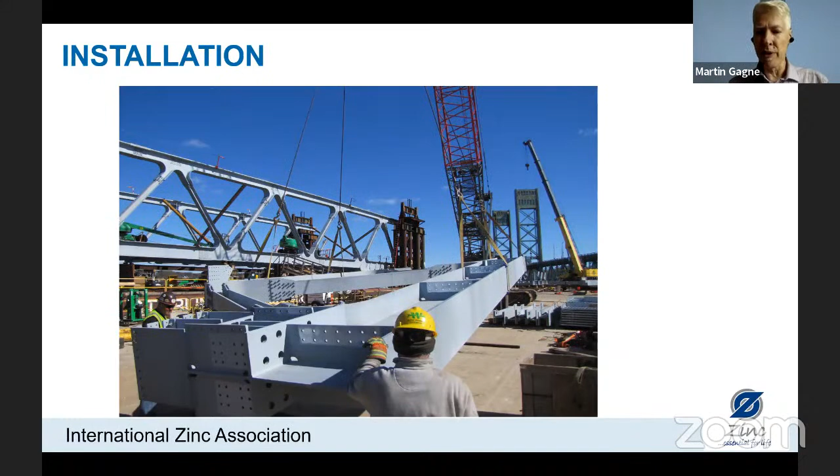The steel was sprayed in a factory, then delivered to the site for installation. We can see here one of the beams that was delivered. This was all assembled with hot dip galvanized bolts, so again we have zinc on zinc—we have no issues for bimetallic corrosion.

We can see the overlap of these connections here. We will have zinc in that gap, and again this is very important—it will eliminate or greatly reduce any potential for crevice corrosion, which can usually start in these locations.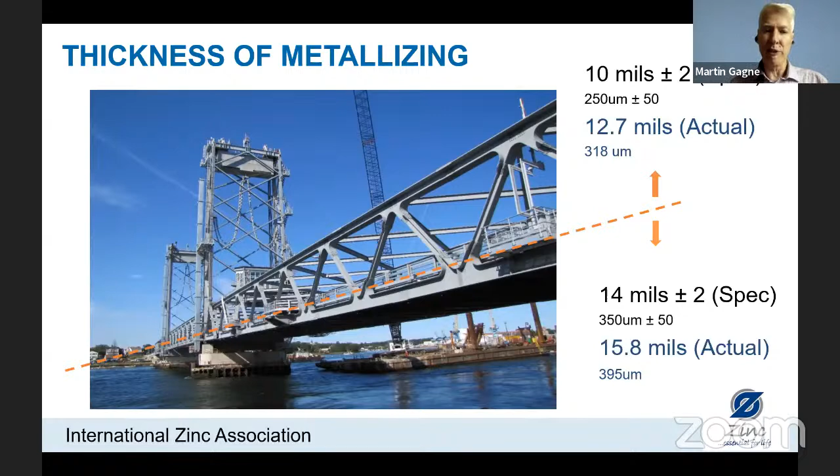This bridge was installed in 2013. It has a 120-year design life, and we're coming up on a 10-year anniversary. There's no rust or staining evident on the bridge as of yet, and it is expected to meet its design life with no maintenance.

Norway—I talked about how Norway has been using duplex coatings since 1965, so we have very good data from Norway about the performance of duplex zinc coatings. I'll do a comparison between a bridge built in 1962 that was only painted, and another bridge built some years later with a duplex thermal spray zinc and paint coating.

This bridge in Brevik, Norway, is 750 meters long. It's a cable suspension bridge with a steel truss structure underneath the bridge deck, and it has a 40-meter clearance over the water. That classifies it—again, we had test coupons on the bridge. It is a C3 corrosion environment.

The bridge was built in 1962 and painted with the traditional paint system, which at the time was an alkyd paint. Through the decades, it had several paint maintenance schedules. In 1992, 30 years after initial construction, it was completely renovated.

They changed the paint system to a more robust zinc rich primer, an epoxy barrier coat, and a polyurethane top coat. Although still, we can see after 9 years, we had some corrosion evident.

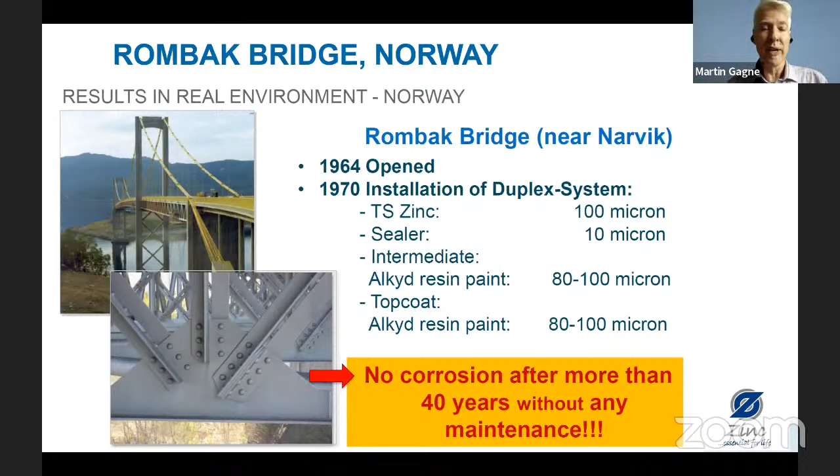The inset photo at the bottom was taken in 2010. This is 40 years after the initial construction. Again, these overlapping riveted joints are prime locations for crevice corrosion, and there's no rusting, no staining at all. The performance has been exceptional.

Now we can look at the maintenance cost for these two bridges to get an idea about life cycle costs. The Brevik Bridge is in orange and the Rombak Bridge is in blue. If we look at time zero, we can see for the Brevik Bridge, it was 30% less to paint that bridge compared to a duplex coating.

Although we had the first paint maintenance of that alkyd paint after 13 years, at which point the duplex coating became cost effective. Then we had more paint maintenance until 30 years after. At that point the paint system was changed to the zinc rich paint, epoxy and polyurethane, and then we went 21 years.

So we can see the improvement in the different paint systems. Looking at paint durability databases, alkyd paints have an average life of 12 years in a C3 environment, and we went 13 years, very close to the paint durability index. The more modern zinc rich primer, epoxy and polyurethane paint has an expected life of 18 years in most paint durability indexes, and here we went 21 years. We're in the ballpark, but on the good side.

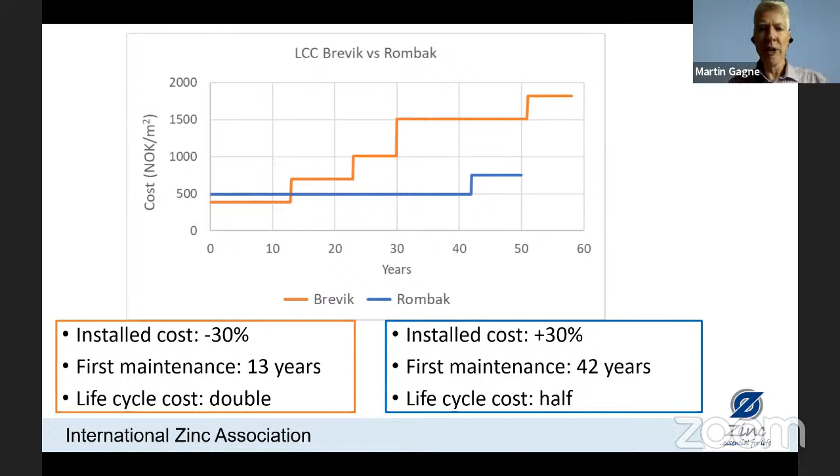So we saw some photos of the Rombak Bridge. I'm going to bring that back here. This was at 40 years. The steel is in excellent condition, but we painted it after 42 years. So did the coating catastrophically fail over those last 2 years?

Well, it did not. But if we look at some horizontal members near the bridge deck, some debris from the roadway has abraded the paint top coat, and so we can see the mid coat coming through. So then it was repainted.

This is also a maintenance philosophy by the Norwegian Public Road Administration. They use very highly contrasting colors between the top coat and the mid coat, so it's very evident when wear occurs.

When the paint needs maintenance, they will be very proactive and maintain the paint. The zinc is never consumed and the steel never starts to corrode. If we use the same criteria of 5 to 10% of red rust evident on the structure, this could probably be left for 100 years before we even start to see red rust, because after 42 years, we have some damage to the top coat, but the mid coat is still in play.

The zinc would have to be exposed and consumed before we start to see red rusting. So significantly longer life with the duplex coating. I think if this maintenance philosophy was transferred also to paint-only structures, use highly contrasting colors between a mid coat and a top coat, take action when the top coat needs attention, not when the steel starts to corrode. Again, you could reduce maintenance significantly and extend the life of structures by being a bit more proactive.

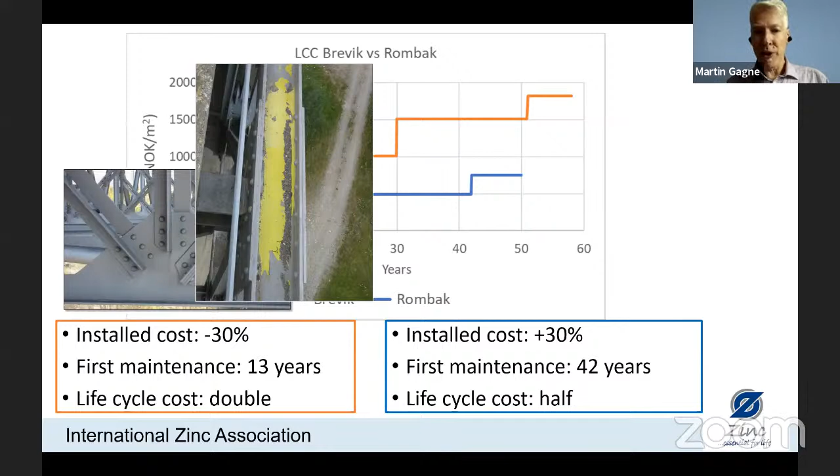So with that, I will finish. I hope I've shown that the metallic zinc and zinc thermal spray coatings in particular provide excellent corrosion protection. The zinc is a barrier protection, but it also adds sacrificial corrosion protection. That galvanic action is quite powerful in protecting steel from corrosion. And then zinc thermal spray coatings are portable. They can be applied in the factory or in the field. And we saw this with the Rombak bridge. So size is not an issue if there are limitations on your steel structure to use hot dip galvanizing.

Yeah, I had some wind tower examples I could have shown, but it has become the default coating for offshore wind towers. The first offshore wind towers off the coast of Denmark were thermal sprayed and painted, a duplex coating. They had a design life of 25 years, and they were 25 years at sea with no corrosion, no staining, and that has become the default for offshore wind.